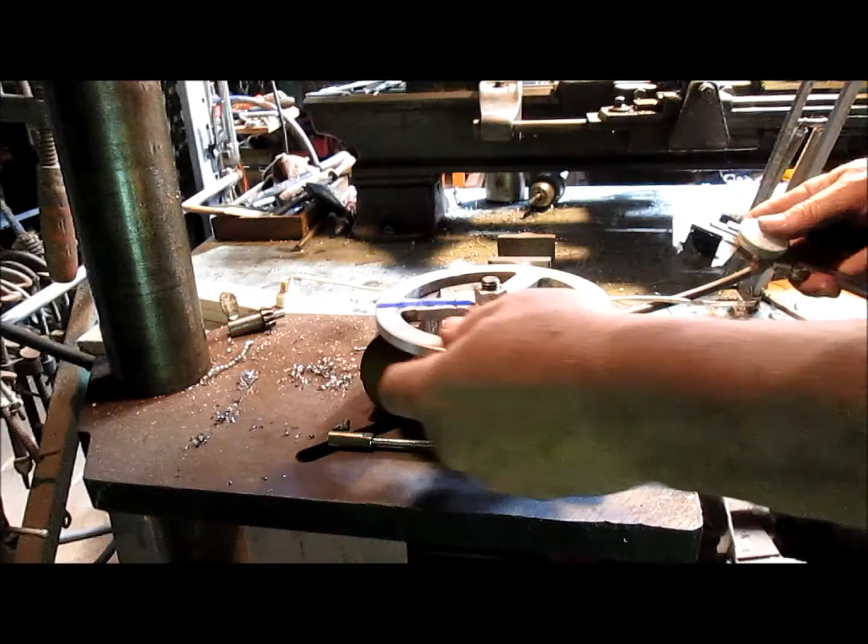Okay, so we're just going to take - and again, this is not an accurate measurement. He wants to be able to get 4 different positions on the wheel. So we'll just take a pair of verniers and measure our distance here. We're looking at...

350, so divide that by 3. No, we need 4 holes. We need 4 holes, so that would be... 2 inches. We could actually do 2 inches because we're never going to go to the center.

So let's just take it to 2 and see what we got. That's probably more than he wants. Yeah, let's just go ahead and do 2 inches. There's 2, and then we can divide that by 4, which would be a half inch under.

And another half inch under. And another half inch. So that gives us 4 positions that we can put this at.

And I'm thinking it might be better to move everything out just a bit, and let's put that hole out at the very tip as far as possible. So let's go a quarter inch from that.

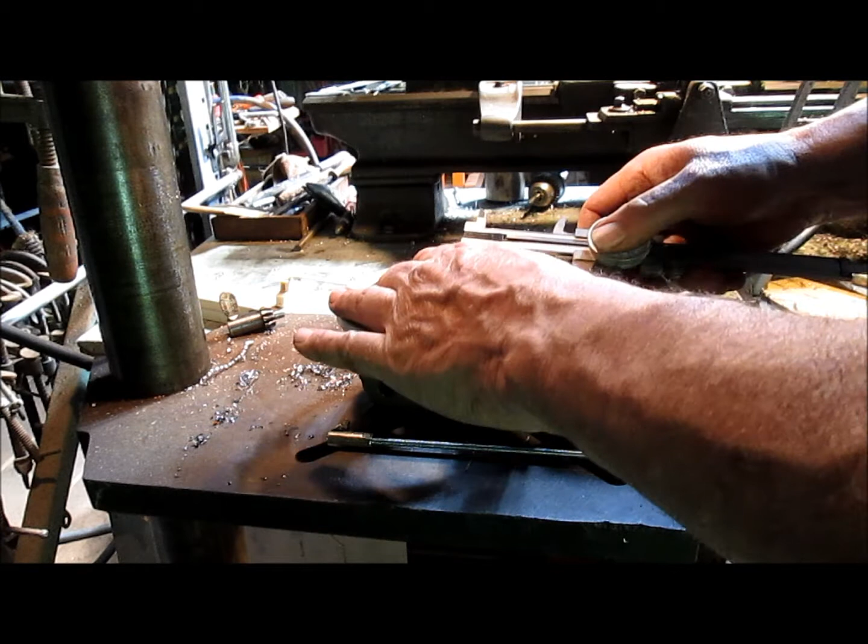And then 2 and 250. Oops, no, 1 and 7/8, or 1 and 750. Yeah, that's better. We'll just drop a little straight edge in here.

Okay, so we're going to put a center punch right in here. That looks pretty good. And one there. And one there. And one out at the very tip here.

We'll go ahead and center drill this. We're going to have to bring our table up a little bit to do that.

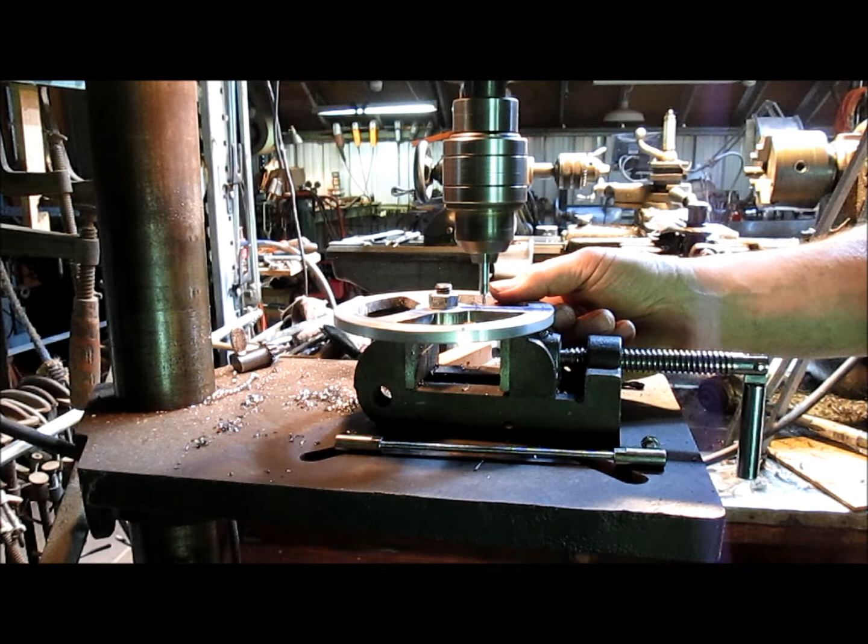Okay. All right, well, it just bottomed out, so we'll get to come up just a little bit higher.

Pretty good. Now we can come back down.

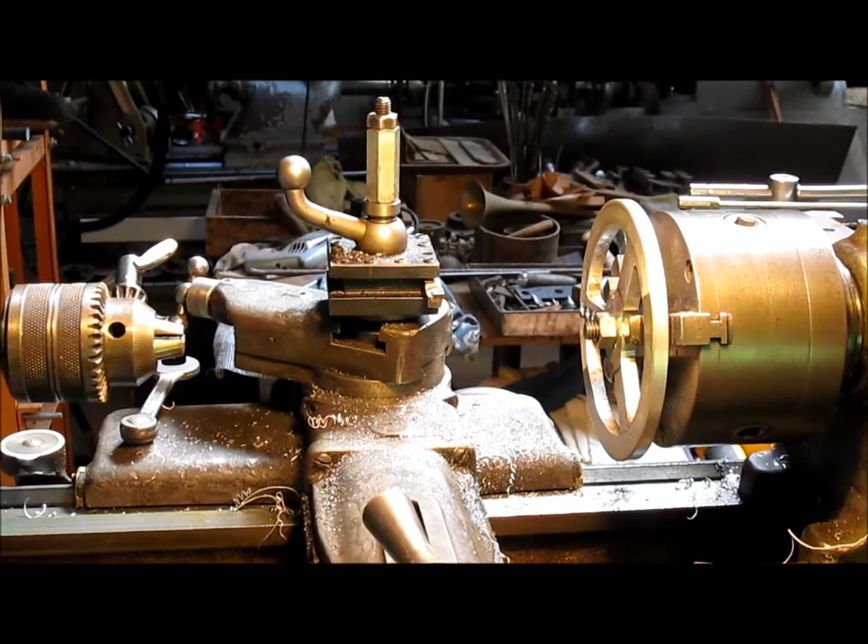Okay, so we're going to make room for the clevis, and it's not here. Oh, here it is. To go around the rotation without hitting the nut and the bolt itself too. So we just have to take - probably we just have to take the bolt off and a little bit of the nut, and I think we're in pretty good shape.

And we're going to speed this up because we don't need it to go slow any longer.

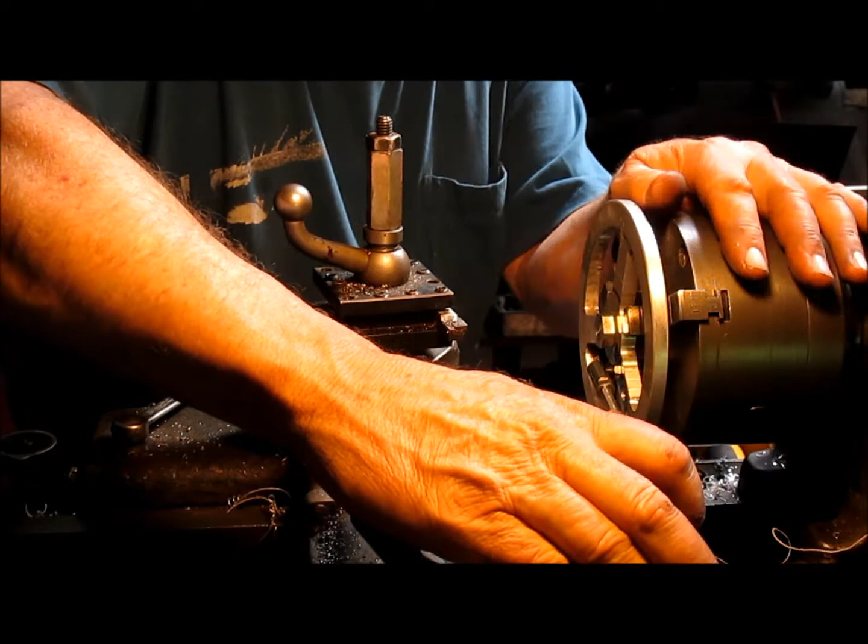Okay, so we're going to rotate around. Well, I don't know, it misses, but just barely. So I think we'll take 2 or 3 more passes just to be sure.

That looks good. Let's go to the closest one because that's where it's going to actually hit the pin. No, we've cleared it by, oh, a sixteenth. So we're good.

Alrighty. Oh, I want to clear out that center hole a little bit.

There we go. We've got some pretty sharp edges right along in here, so we've got to come in with a file and clean those up just so nobody cuts themselves. Other than that, oh, and no sharp edges out here, so that won't be a problem. Other than that, this piece is done.

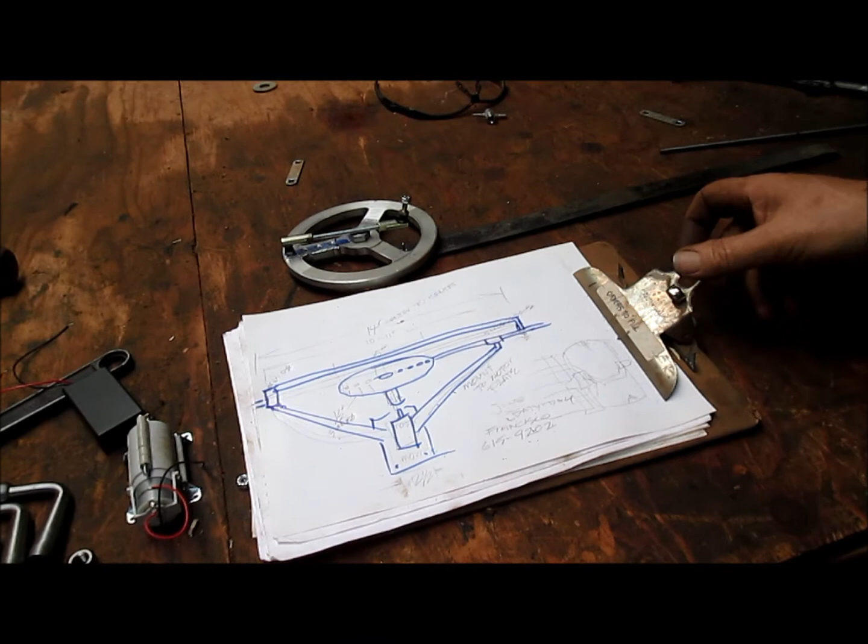Okay, what we've got is, and I'm not sure how we're going to lay this out, but I know what we need. And that is we need an entire thing to be less than 14 inches. And then our swing wants to be, I can't remember what it said here. It says, okay, somewhere here. The swing was something like 5 inches.

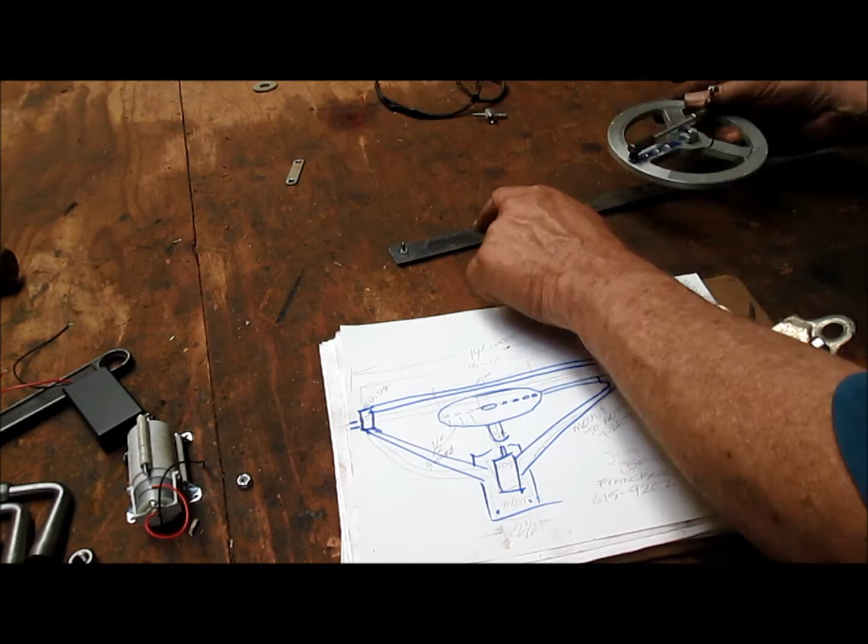Oh, there we go. And so what I've done is I put a little bolt on the end of my tape here and drop this down on there so it'll stay somewhat in place. Now I can rotate this and see what my measurements are, and I'm exactly at 7 inches right there. And then as I come back, I'll be at 2 inches. So that's about a 5-inch swing, which is what he wanted.

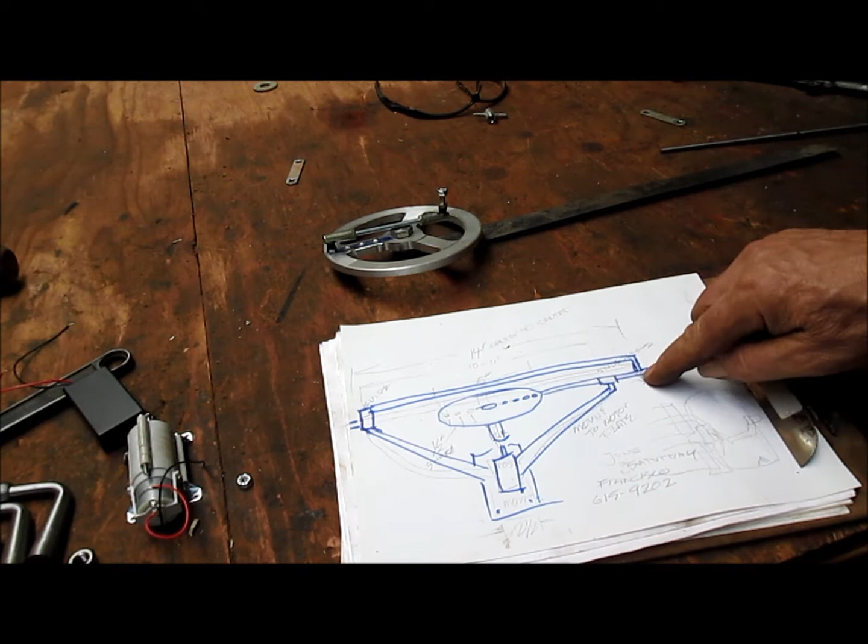And now what I have to do is come in and do a cross piece that goes all the way across to the other side, this piece being here. So something like, let's see if we can do this. Something like this. And I already cut a small piece of strap because we don't really need much else.

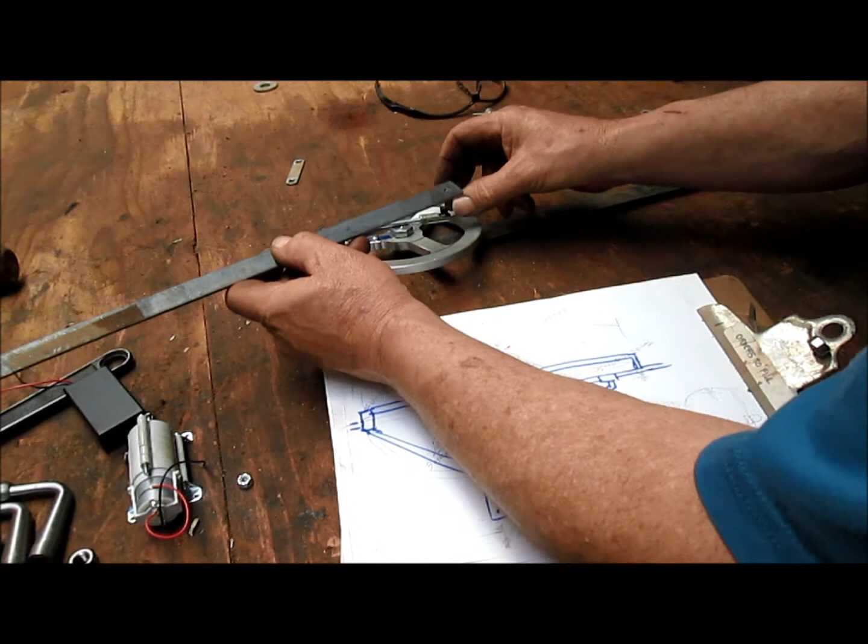Tighten this up on the strap.

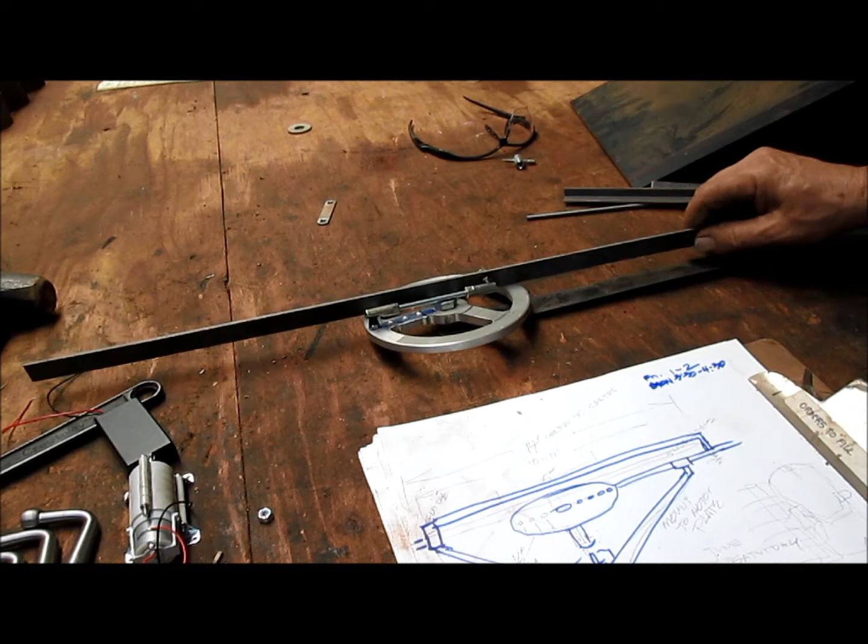We've come up with a different plan, and I think a better one. Really what we're going to do is use an entire piece of strap and have it go back and forth. And catch, there it is. This will give us, it'll be in runners, and so then it'll go around because the wheel will be rotating it back and forth. So it'll stay straight and the wheel will rotate. So that's pretty good.

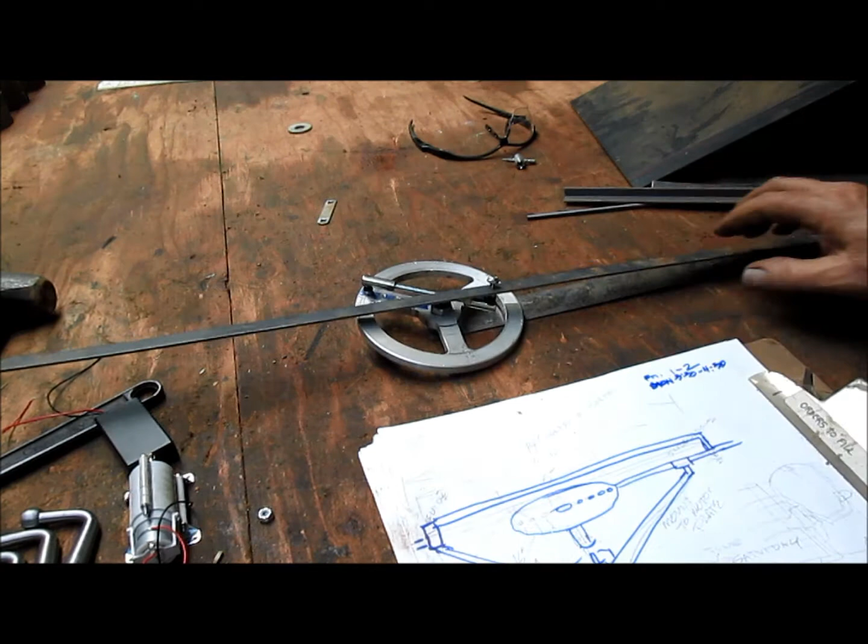And I got a piece of plastic, and we're going to cut a strip out of it on the table saw. And then I'll probably throw it in the mill and mill a groove out of the interior so that my strap, and here's another piece of strap like it, can kind of sit down inside of it, and I'll have a bottom and a top, and it'll grip it, and it'll keep it from making a bunch of noise when the thing goes back and forth. Because if you put this on metal and slide it back and forth, it'll make a bit of noise.

Whereas with this, it'll actually make less noise than that, and put a little bit of oil on that and you're in good shape. So we'll go ahead and do that. I'm going to cut my piece of plastic. This is, I think, Delrin. I'm not sure. Anyhow, cut my piece of plastic and then go ahead and mill it. And we'll be back.

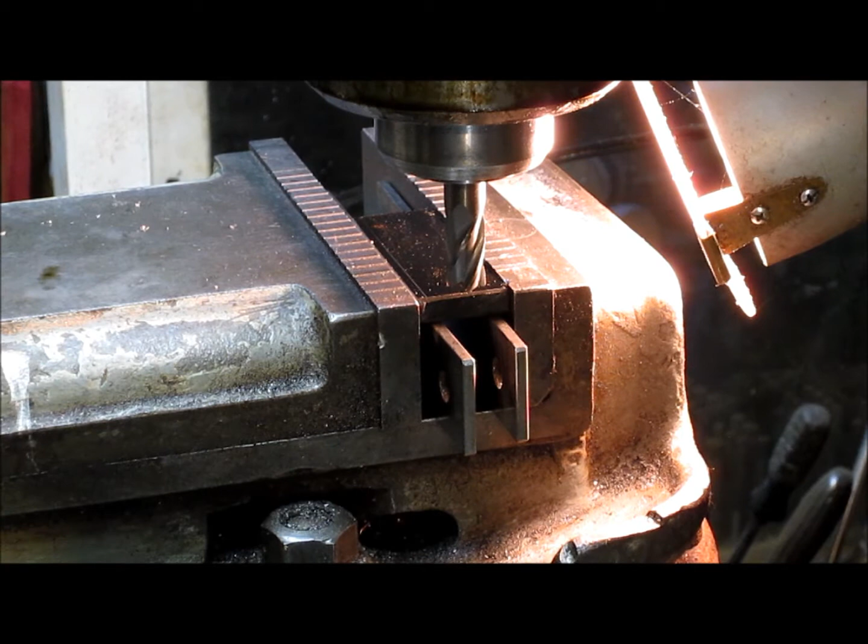It's the next morning, and we've taken our Delrin strip and we've cut it into 4 pieces. And what we're going to do is go ahead and run a groove down the center of this Delrin so that our piece of strapping can slide back and forth through the Delrin, and it'll be a quiet ride.

So we're set up here. We're ready to move forward. We've got everything buttoned up nice and snug. So what we want to do first is touch off, figure out where our, I'm going to move back just a little bit here. Figure out where our 0 is. Okay. We also want to go slower.

That's better. Come on back over so we can touch. And then just come on up until we find 0. And then we want to go 50 thousandths down from there. There's 50.